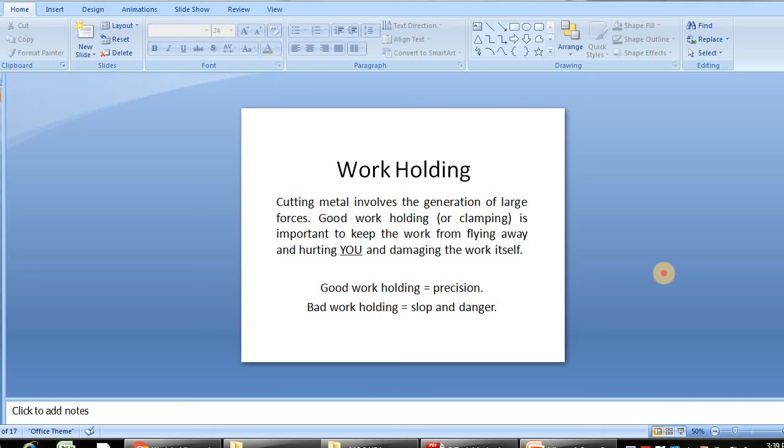Myself S.S. Dugale, and today I am going to deliver the lecture on work holding devices. CNC machine tools frequently operate at greater feed rates and speeds than those used in conventional machining. So, larger forces may be applied to the component and therefore to the clamping or holding devices. As the programmer, it is part of your task to decide what type of work holding device is required for a particular operation. So, cutting metal generally generates a large amount of force.

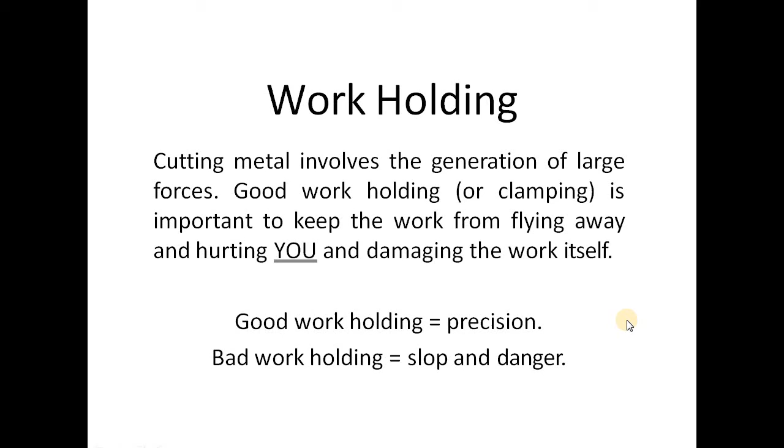So, good holding or clamping is important to keep the work from flying away and hurting you or damaging the work itself. So, good work holding is precision, and bad work holding is nothing but sloppiness and danger to the human being. So what are the factors affecting the work holding devices? That is the most important part, because before going to the problems in work holding, we have to first check what are the factors affecting the work holding devices. In detail in the later section we will see.

Metal to metal. To clamp is to put things in compression. For any clamping, we have to put the clamp in the compression state. If the clamping force is not directly supported, there will be a bending moment created. This will cause distortion in parts in the best case, and can cause the parts to fly away with the spring energy if the clamps let go.

Second is clean clamping. Clean clamping is most important because debris, especially chips of various metals during the operations, will cause damage to the work when they are caught between the clamp and the workpiece. It will also move the clamp or the workpiece, or cause slipping of the workpiece. So clean clamping is important.

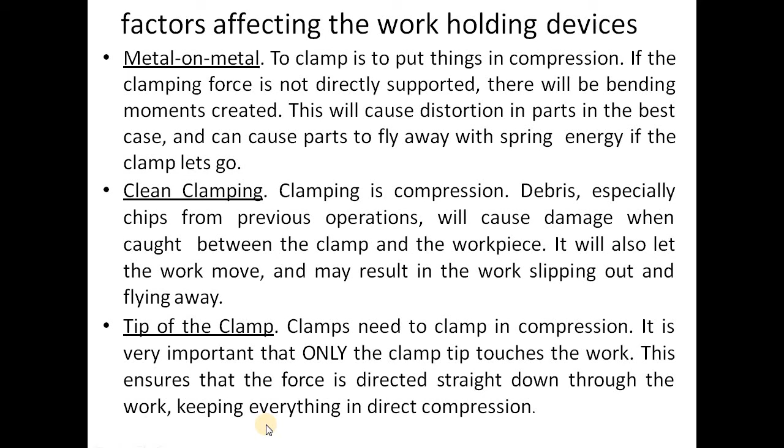Tip of the clamp. Clamps need to be in a compression state. It is very important that only the clamp tip touches the work. This ensures that the force is directed straight down through the work, keeping everything in direct compression.

Another is no twist. We know that cutting generates a large amount of force in any direction. So our job is to keep that particular workpiece in a stable condition. Engineers are expected to understand where these forces will be directed and design the work holding setup accordingly. Failure to do so will result in damage to the work and injury to the human being, and improperly restrained forces cause the work to pivot about the clamp. So there should be no twist during the clamping.

Where is that tool going? Remember, the programmer writes the program and feeds it to the computer, but we must know where the tool is going. Work holding must not interfere with the movement of the cutter or the tool. The clamping system will not interfere with the moving tool. So check the cutter path before starting the cut.

And just enough force. Some materials undergo elastic deformation. So excessive pressure or force causes the work to be distorted, or can cause elastic distortion of the work, which leads to loss of accuracy as well as damage to finished surfaces. Severe over clamping crushes the work, and under clamping will let the work fly. Clamping in compression causes the minimum distortion. Consider using clamping intermediates like brass shim stock to save the surface finish. It will affect the surface finish, so just enough force must be applied.

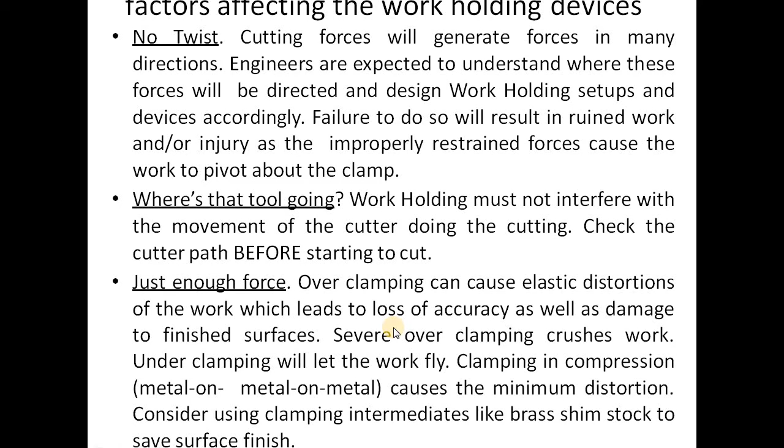Next is what's under the tool. The cutter will cut the machine as easily as the work. If the cutting operation is through the work, be mindful of what the cutter will be cutting under the work. Consumable materials can be placed under the work to support it, especially in the case of thin and delicate work. Precision milling of sheet metal is an example of this. So before going to the clamping, see what is under the tool.

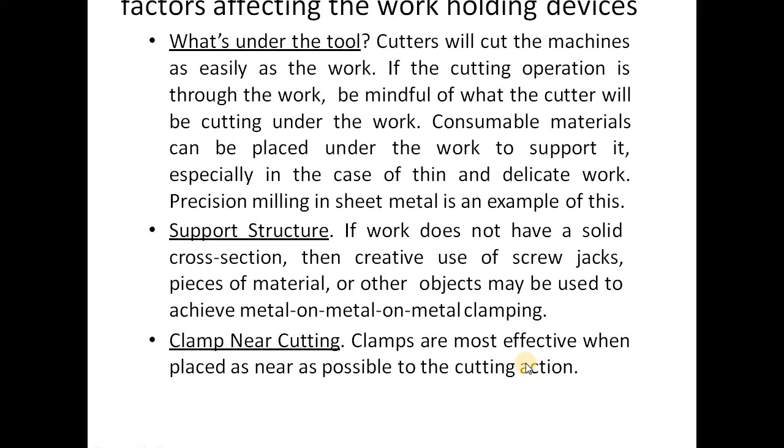Case number 2, the clamping to the table. In the previous case, this same job is there, the same clamping is there, but instead of 2 clamps, there is another clamp, what we call a third clamp. The addition of the third clamp distributes the forces, minimizing the distortion. 2 clamps on opposite sides of the work will also work to stop twisting of the work. It also avoids the twisting.